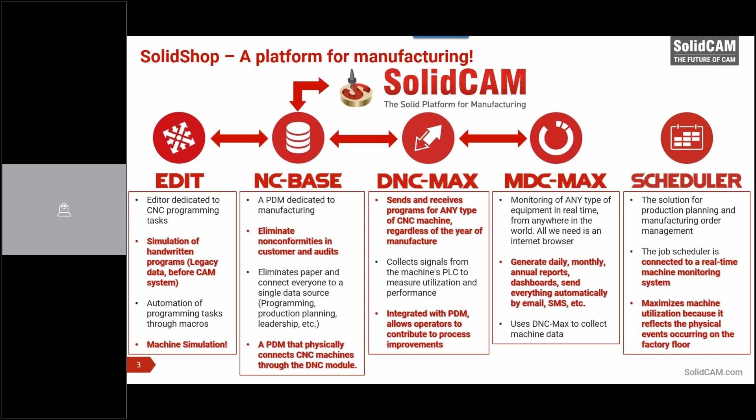So instead of spending $500,000 or $250,000 to implement a MES system that will take a year to be implemented, with SolidShop we can deliver a mini MES system for a fraction of that price, and depending on the number of machines, within weeks. Okay. So you see the data flows from one module to another, sometimes bidirectionally, and that's why we call this an ecosystem, because the data gets out from SolidCAM, enters the PDM, and then it's reused across multiple applications.

So what are the key business processes in a machine shop? We know that companies can have hundreds of processes, but let's talk about the very basic ones, okay? Everything starts with the quotation or estimation. Nobody manufactures anything without having an idea of the cost. Unless you are strictly a prototype shop, or nobody cares about that. But in general, a machine shop needs to know how much it's going to charge or how much something is going to cost to be manufactured. So this is where we start.

SolidShop currently does not have a solution for quotation, but we are talking to industry leaders, and we are going to bring quotation solutions to be integrated with SolidCAM and SolidShop. So we also cover this part of the manufacturing process and the manufacturing business. So we have CNC programming, which is where we operate on a daily basis. Nothing new here for us. So the first part of SolidShop is the PDM, the manufacturing PDM.

I'll try to make an analogy here. Programmers, they are like composers. Okay, you have an orchestra, and then you have a composer, right? The composer writes pieces of music to all musicians in the orchestra, but the composer does not execute this music. He just writes them. So that's similar to the CNC programming process, because a programmer selects and conceives the manufacturing process, selects tools, fixtures, all the parts, all the resources that are necessary. He thinks in the order of the operations, which tools in which order, or which side of the part I'm going to machine first.

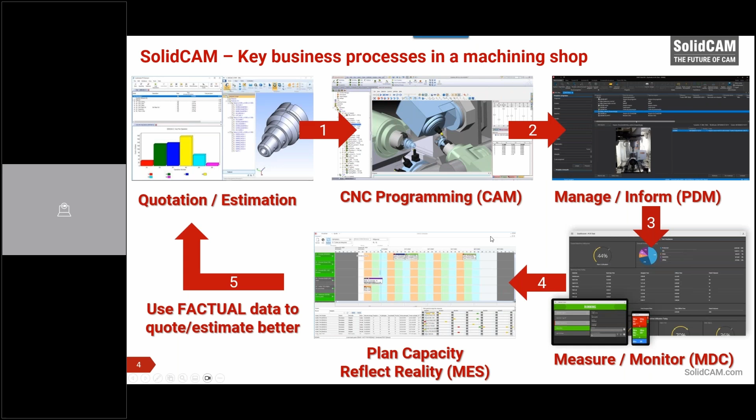And we believe that this will help us to increase our subscription rates and our margins in general, but also deepen the relationship with these companies because they will be happy with the technology we are providing them and solving multiple business problems instead of only CNC programming. So this is what we see.

For example, for the CNC programming department, we can offer CIMCO Edit, machine simulation, the PDM, which could be NC-Base or AMDM, like I said, depending on your needs. And we also have the DNC-Max, so they can manage all the communication with the machines without leaving the CNC programming office, which is something that management appreciates because programmers are more productive and they don't have to spend time in the shop floor solving basic problems.

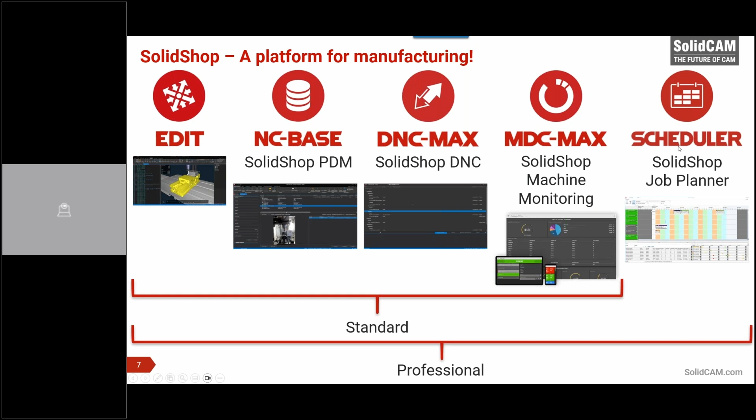And to finish, these are the companies around the world that are using this technology. So NC Base has been around for more than 25 years. DNC Max as well, CIMCO Edit. We also have the monitoring system that's been around since 2007, so almost 20 years. Very tested, very proven technology.

Works a lot on protocols and minimizes the usage of specific hardware. So yes, we can work with old machines or new machines, but if you have a newer machine, which is probably anything manufactured after 2010, 2012, you have protocols that are based on software and TCP/IP, which eliminates hundreds of issues that are created by the technology used by most of our competitors.

So now that I showed this to you, I'm going to demonstrate what this is in a nutshell. So I'm going to open SolidWorks and the PDM module as well. So let me just log in here in the database. So the first thing is that to access the PDM, you need to log in with a password. No one changes the program anonymously. Everything that happens needs to be tracked and is linked to an account and time and a backup and a version. So this is what the PDM looks like.

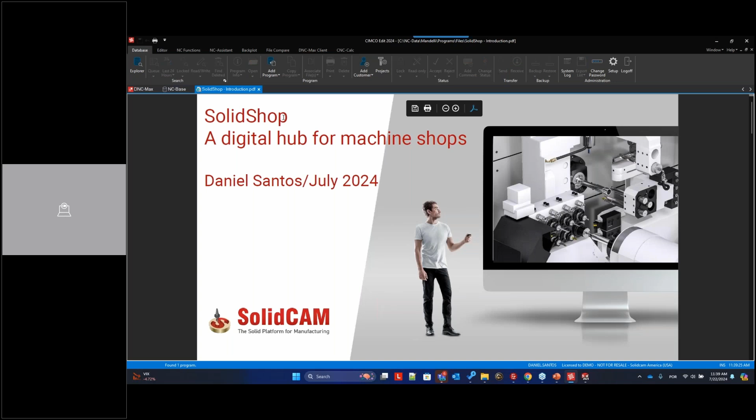If I want to make a change on this file, I can go here and say, well, I want to make a change on this PDF. So the first thing, I'm going to back up this version. And then I can go to Adobe and let me see here if I can change anything yet. So this is a viewer, so you can see this on the PDM client or a web client, but I could open this in Adobe Acrobat.

Let's see if I have the edit with Acrobat. And I'm going to call it SolidShop 2024, just to make a difference here. And we're gonna save it.

Okay, so now if I go here and open this document, this is the version that I have, right? The current version, because I made a change in Acrobat. But I could go here and say I want to restore this version.

And now if I open this again, I see the previous version. So you can make versions, and you can restore backups and all that.

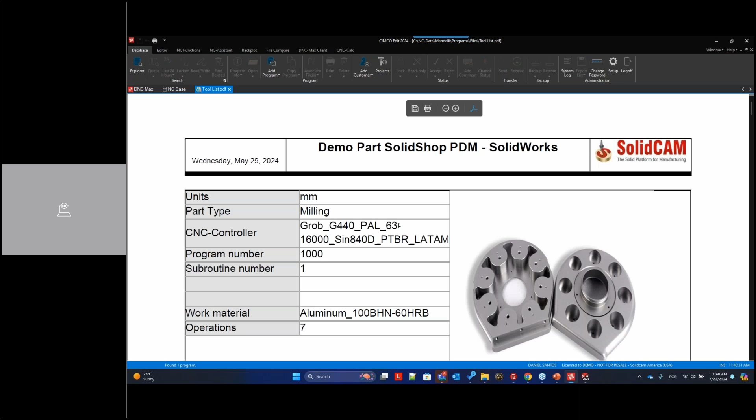You also have a tool list that's generated by SolidCAM, which can be linked to your document, or just like a setup sheet or something, or a tool list, like I said. You can associate pictures to your parts.

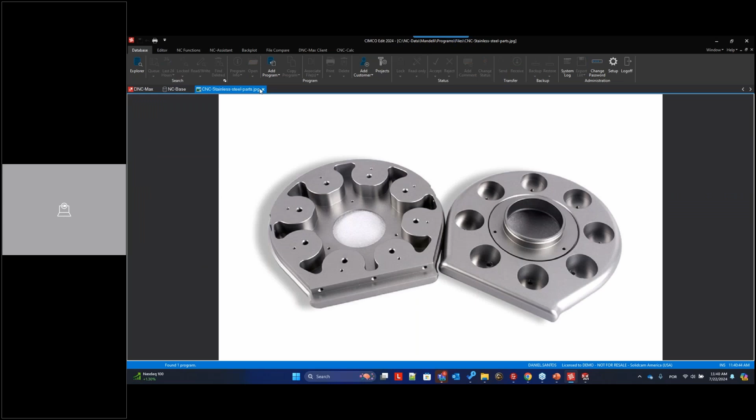You have here the change view, so you can preview the documents, or if it's a picture or a PDF you can see that, or you can preview the CNC program. But you always have here the event log, where you can see everything that happened with that document. So I can see only the preview of my document, or only the log, or both.

I can also add notes here that will force anyone who tries to open this document to read it. So let's say we need to wait for the new Emuge tap. There's no way that someone can say, I did not see that note.

And you can go here and change the status - this program is locked, already locked, you see? So people cannot send it to the shop floor right now because the document is locked.

So I'm preventing someone from using the CNC program or downloading at the machines because I'm waiting for a new tap for the CNC program. I can unlock this and say this program is now approved to run. So the system removed the locked flag here.

I can remove the notes as well and can send this program to the machine.

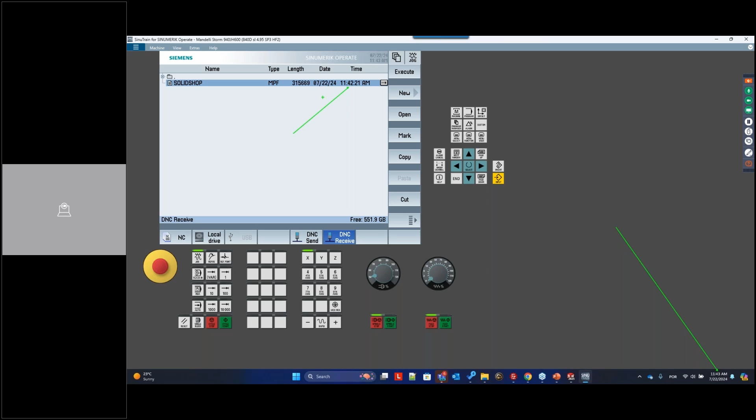And I go here to the DNC receive. You can see here that the CNC received this file at 11:42, which was a few seconds ago, okay? And I can simply copy this to the CNC memory and go here in part programs and paste it. I'm going to overwrite because I already had that program in the memory.

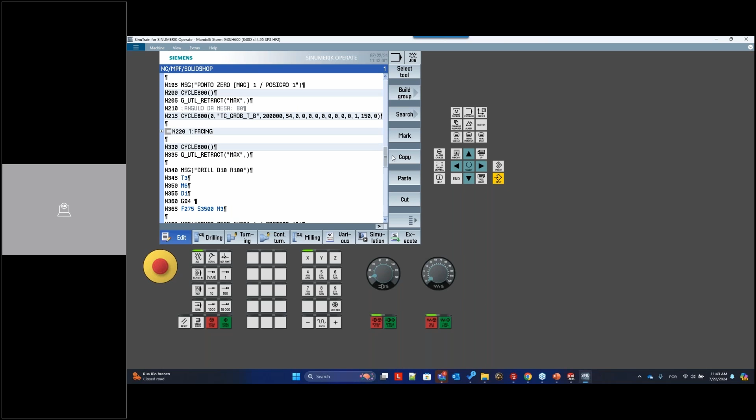And I'm going to make a change here, just one of these hard to read Siemens cycles here. I'm going to add an extra 0 here and break the cycle. So this angle here is going to be, let's just say, 3 degrees.

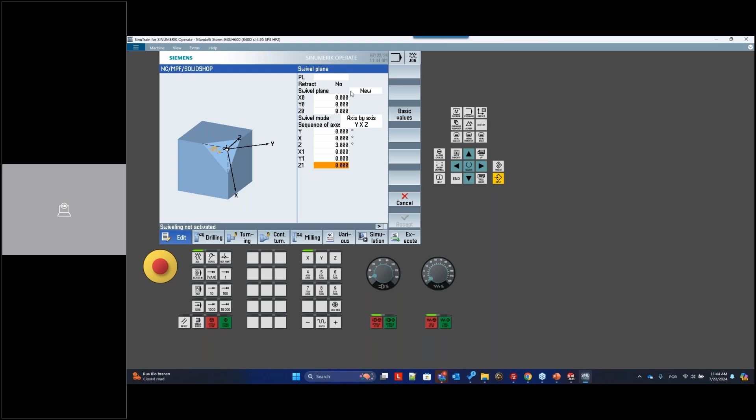Basic values - oh, yeah, I cannot do anything here because swiveling is not activated. So, by axis and basic values.

I don't think it allows me to change this because this is like a free version of the simulator. So I'm going to try a more standard cycle. Let's say that I want to change this coordinate here - a very small value, okay? As an operator, I'm making changes and they're very hard to notice, okay?

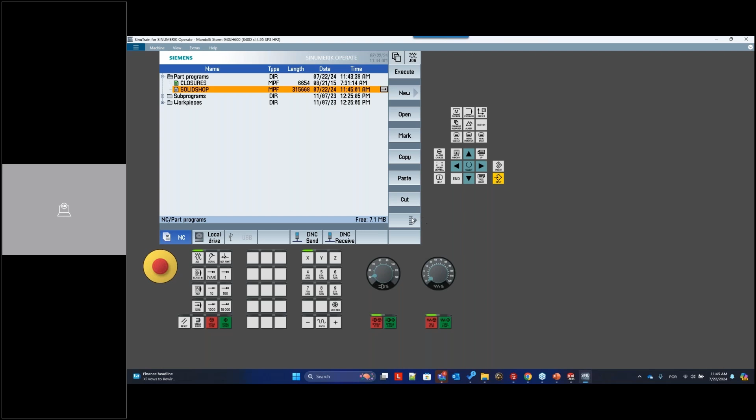I'm also going to open this iMachining operation and delete that small place here. And now that I've run this, I'm going to send this to the DNC from the machine - copy from the machine memory to the DNC.

And if I go now to my PDM product, I'm going to show you that I can also generate changes from SolidCAM. So now we have this instance here called import queue that shows me that we have a change that came from the machine. So let's compare and see this change.

Time and date, probably nothing else. And what I'm going to do now is say I'm going to reject these changes because they don't mean anything to the process, just date and time in the header. You can see here that Daniel rejected those changes. So let's just copy this again - from the machine memory to DNC.

Let's see what the PDM tells us. It shows there was a change again, so let's compare and see the difference the operator introduced. On the left you can see our current version, and I'm comparing my original version with the version awaiting approval, the version that came from the machine.

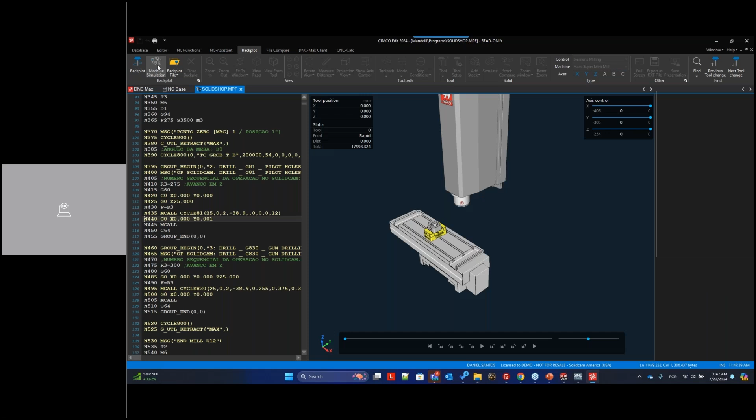Now I have machine simulation. I can add more machines to this setup or change the machines. Let's say I want to use a bigger machine, so I go to machine models - I can download them from the database. We can build these machines for you, and resellers can sell that as an extra service. If they have the machine simulation license, and the customer sends machine models to build or post-process the VMID file, you can use these models to build the machine simulation in SolidCAM and charge for that service.

Let's say I want to put this on a VF5 machine, so I'm going to install this machine. Now I need to close this - I can go here and say I want to use the VF5 instead of the mini mill for machine simulation, and now I have a big machine again.

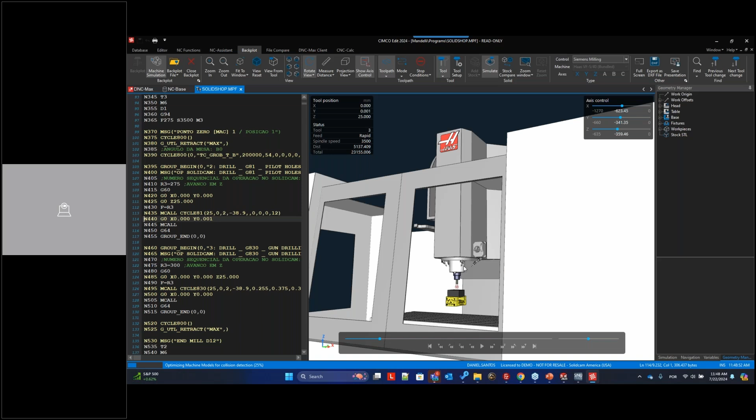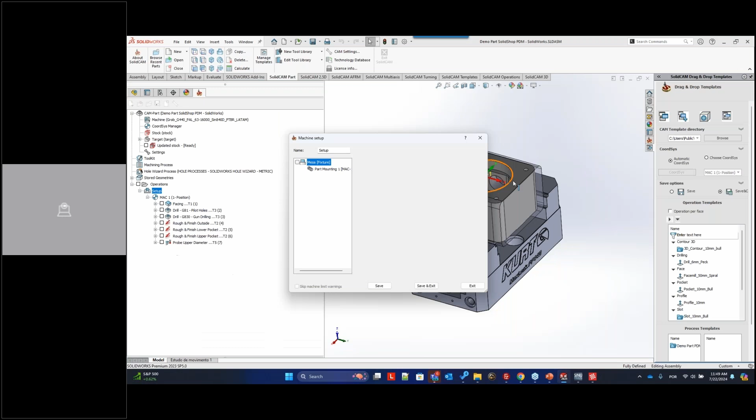I need to adjust this in the SolidCAM interface. So when you go to SolidCAM, you need to change your post, and on your setup you're going to select your mount, everything, and then this is transferred automatically to the interface, including this, okay. So if I go to the machine simulation, I also have the tool setup with all the tools that were transferred from SolidCAM - this is also part of the interface.

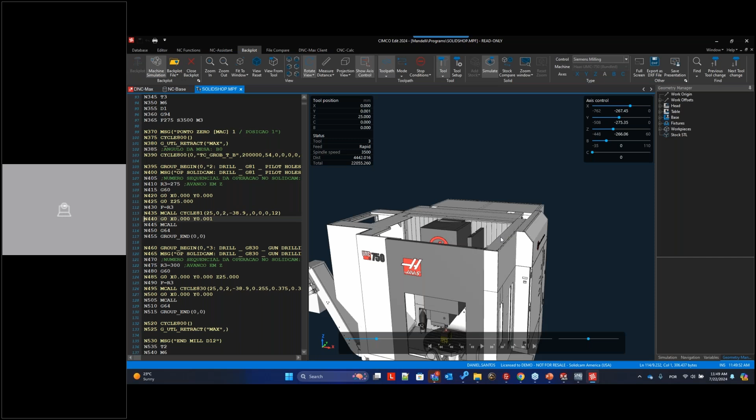Let me just mount this on a machine that has the proper point - let's say the Haas UMC. And then I can go here and say I don't want to see the base. Let's run this process from the beginning so we can see what the operator did.

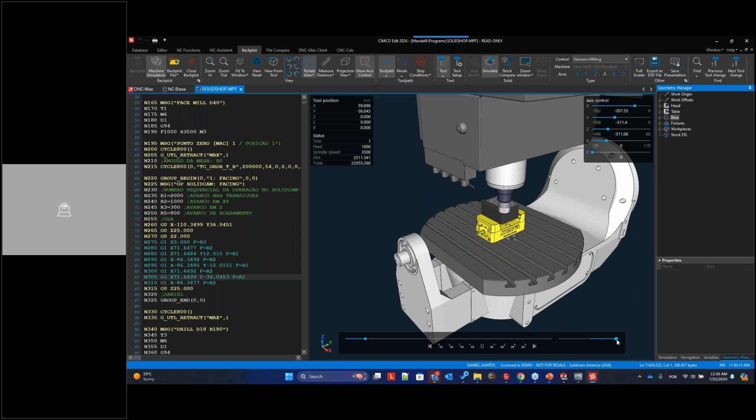So you are doing G-code based simulation, like VeriCut. You can also go here and say I want to simulate this, check the limits of the axis, see what happens when I do this or that. This machine simulation is fully functional for up to 5 axes.

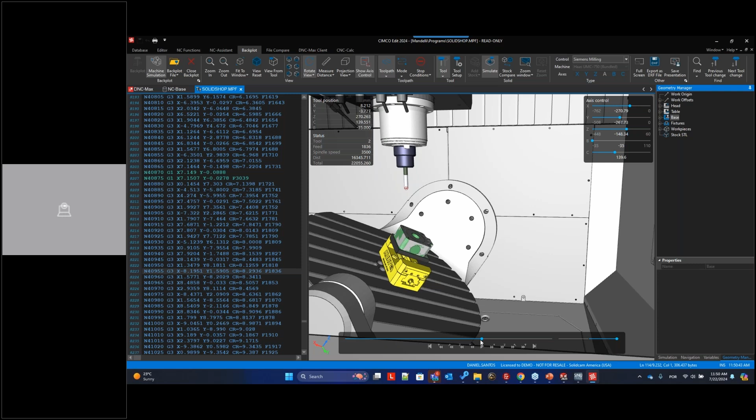You can measure things - let's say, for example, that I want to section the part. I'm going to reset this because I need to start from the beginning as I move with the axis. Let's say I want to understand what's going on inside the part. I can go to my stock model and say cross section on the Y minus direction, or Y plus - sorry, Y minus.

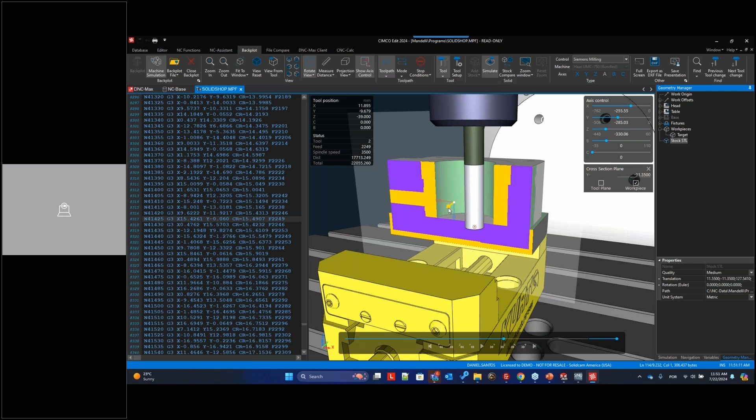I can dynamically push and pull and see what's going on here. I can change the sectioning plane. So I'm going to reset this, remove it off - the cross section is off. And let's finish this.

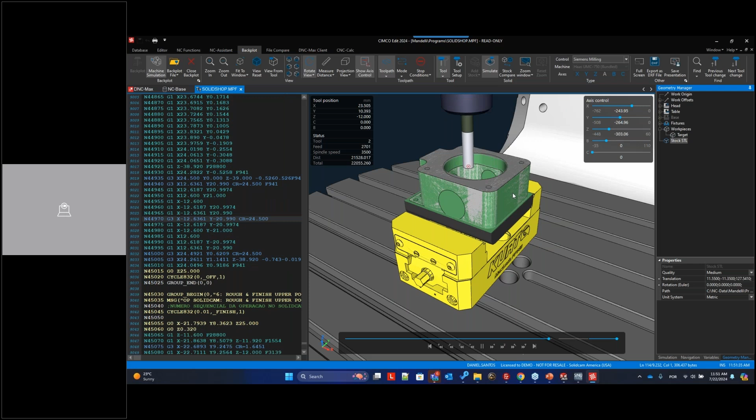Let's suppose I'm going to make a change here now. As the CNC programmer, I'm going to introduce a very big mistake here, an error that will cause a collision on the machine. Let me see if I can move this - no. Around here, I know I can have a collision, okay, so let's say G0 X minus 200.

If I make this change, the PDM is going to prompt me: look, what are you doing here, why did you change this? I'm going to say optimized code. So did you mark it as approved? I'm going to say no - you can customize your questions here. I can go and say I want you to prompt me for multiple issues, like did you check the tooling, did you update the tool list, and so on. Let's see - logging, log chains. I'm going to say optimized code, tooling changes.

You can configure that on the PDM, and you can say, did you update the tool list? That's required. Did you update the toolkit? The answer is required.

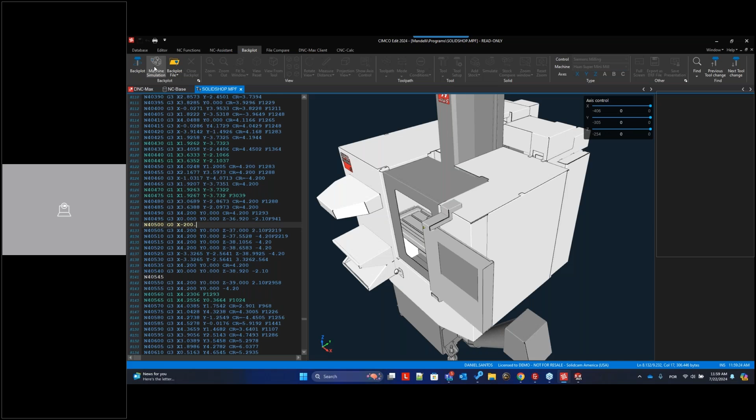Now I'm going to close this. I have a technical issue here, the meeting might kick me out, but let's try again. Okay, so I was showing a change that can be introduced by someone. Let's go back to the machine simulation, resume where we were. I'm going to go with the Super Mini Haas again, just to save us time.

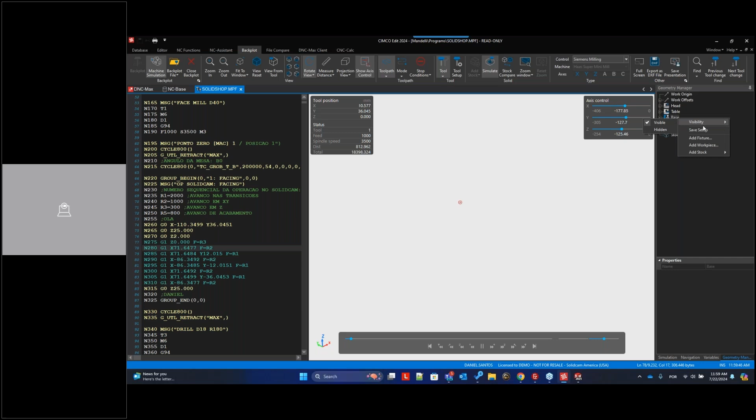So you can see here that we have a major collision in the process. Let me just hide the machine base so we don't have problems. Okay, so speed up.

So this change that was introduced by the CNC programmer, we can now detect that. But let's say that it was the opposite - let's say the operator introduced this. Because we have bidirectional control on the PDM, if the operator introduces any mistake on the code, before we release that program for production again, we can simulate.

And if any changes that were made on the machine are causing a collision or a problem, the machine simulator will catch it. So the point of the machine simulation and our PDM is that you have bidirectional protection. You can quickly control who changes what, when something is changed, why it was changed.

You can roll back backups. So let me roll back the good version then. I can go here to the data - this version is bad, right? So I can compare with the previous version and see that the mistake was introduced here.

So this is backup number 34. I can click here on version 34 and say restore this version, because this version has no collision. Okay, so I go back again, open, simulate.

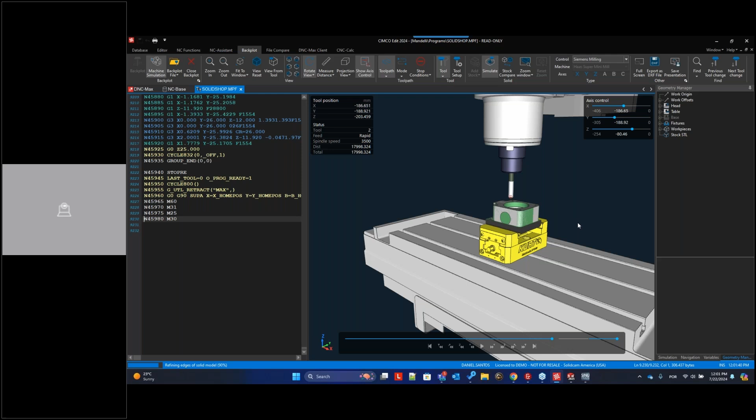So this is something that for years we were not able to solve for the customer - what happens if the operator introduces the problem? And what we can do here is just go here...

I have an idea here in the location that I can cause a good collision. So this is going to be around 40,735. Let's see, yeah, around here. So I'm going to go Z minus, let's say G0, X200 now. The operator introduced this error in the process.

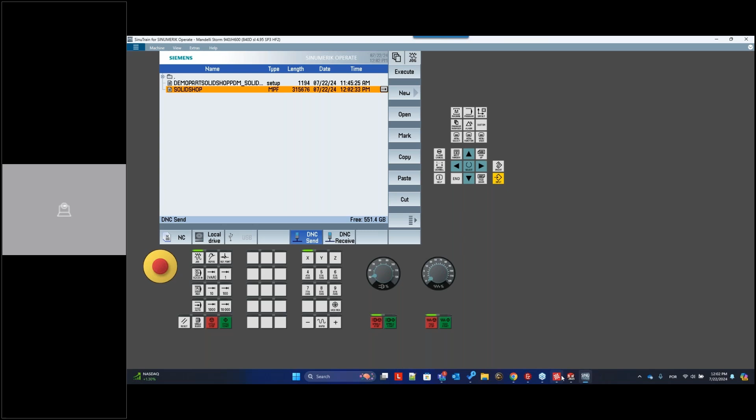So we go here, we're going to copy this from the CNC memory to the DNC system. DNC Max will detect the file change. I can show this to you here. And you see that we just received a change.

So look at this - at 1202, which is here, a file was received and it's awaiting approval from a programmer. So the change does not overwrite the latest version of the database automatically. A programmer needs to approve that. So I'm going to go here and queue.

I'm going to compare the change. And I can see the coordinate that the operator introduced, but I don't know what the effects of that are yet - I need to simulate to see. So what I'm going to do here is accept the imported file and simulate that.

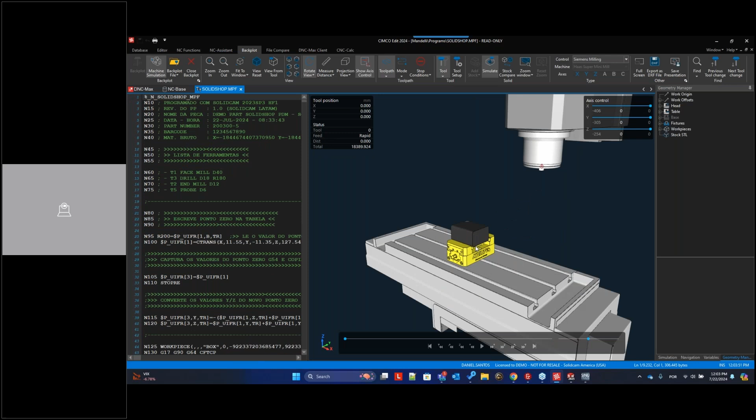And now I want to show you the SolidCAM for operators also playing a role in this. Okay, so I'm going to simulate this again. And now we have the error that the operator introduced.

So we have protection bidirectionally. So now I can go here and say this program has failed. I can also configure these life cycles with any names I want, but for now I'm going to just go with the default names. So now this program is locked, it cannot be sent to the machines because we need to fix the error that the operator introduced.

Roll back an old version or something - I can compare in the timeline any version I want. I want to compare version 25, which is from May this year, to version 5, which is also from May. Compare the selected versions, and the system shows me everything that changed.

So you can sell this to the customer. Imagine that you are doing an ISO 9001 implementation, and you need to provide evidence to the auditors about every change that occurred in the manufacturing process for the past 2 years.

Let's say in the worst case scenario, there's an FAA investigation, a plane fell from the sky, and the FAA needs to start investigations, and they go to the shop that manufactured that part, and they need evidence of every change that was introduced in the process. This is how you do it.

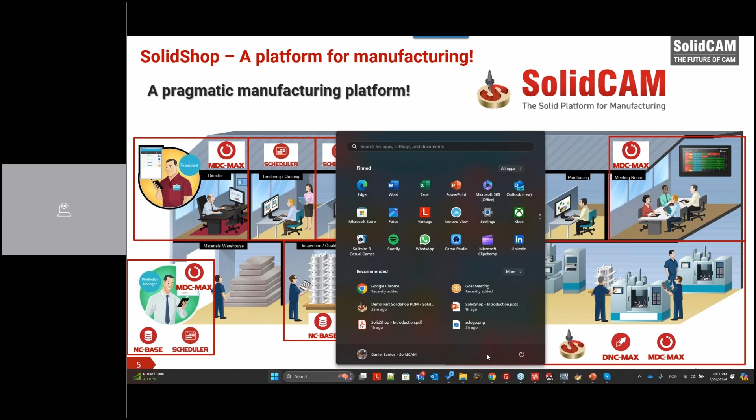So let's just go back here to our presentation. I want to highlight that slide with the company processes. It's here. So I have this part in SolidCAM for operators, and I have this digital ecosystem in the shop floor or in my business, this one here, right? Where CNC programming is connected to the other departments. So production. Okay, so I have this slide, and I want these guys here from the production shop to mention this.

One sec, let me take this. Who is this? Hello?

Okay, so what I want to do is make sure that no one is editing a file that is being edited by CNC programmers or vice versa or operators. So if I have SolidShop and I have SolidCAM for operators, let me show you how this works. Right now, the CNC programmer is on the upper floor working on this part, and an operator in the shop floor tries to open the same process.

So I can go here. He can do this also from the NC-Base client, select the file and ask SolidShop or SolidCAM to open this. So I'm probably not opening the same files here. Let me just highlight this. So this is my CAM part properties. I want to make sure that I'm opening the same file. So this is, yes. Okay.

SolidCAM for operators, close, open. Yes. Let me make sure that I'm opening the right file here. Because when you try to do this, the system will basically say, you cannot open this. It's like trying to open the same file that is stored in the network from different places. Yeah, you see, that's the reason.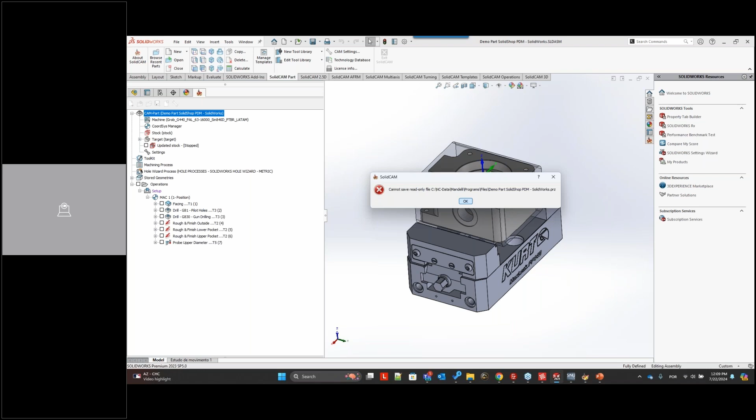When we restarted the computer, we got the file saved as read-only. So that's why SolidCAM is not detecting the change. So let me just fix this. So this goes here. This file should not be read-only. That's the problem. Okay, apply. And SolidCAM, close. And same thing here. Open. Good.

Yeah. So you see, it says that this file is being used, right? Because someone is trying to use it in SolidShop, SolidCAM for operators, in the shop floor, and vice versa. So it protects the file from being edited by two different people in different locations. They don't even have to be next to each other, because we have this protection mechanism that when a PRZ file is opened, you cannot open it from another.

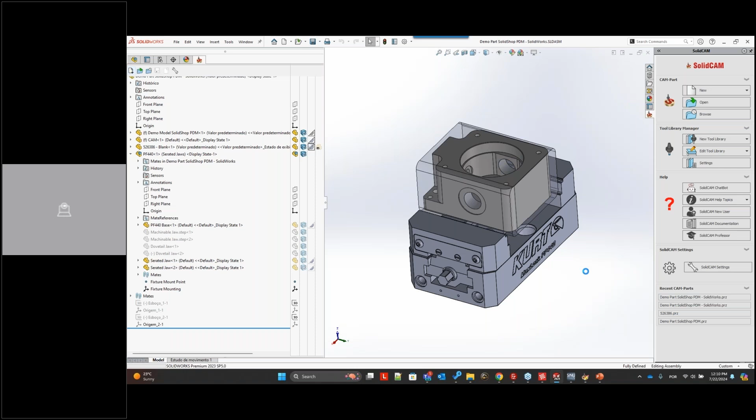The PDM is managing one central location, one single file to be shared in the whole company. So we protect them from editing. So this is the value of SolidCAM for operators working with the PDM solution, right? We also have the ability to back up our file.

So imagine, for example, that you want to introduce engineering revision, okay? If you don't have SolidWorks PDM or Autodesk Vault, you are managing files only in SolidCAM PDM. And you want to introduce a version control on your PRZ file. So what you can do here, before you implement the change, you can go here and say, make a backup.

Now you can make whatever change you need in the SolidCAM file. If something goes wrong, you can always restore the previous backup and ensure that you can restore your good file. And finally, I just want to show here a basic example of editor functionality that we do not explore much. So imagine that I have a bad bearing on the machine right now, but I still need to finish a batch of parts.

So what I'm gonna do here, I'm gonna go to this editor and say, reduce the feed rates by 50%, because I don't want to completely damage the bearing, but I need to finish this batch of parts before the machine builder can ship me a new bearing, because they don't have it in stock. So I'm going to reduce the feeds and speeds by 50%, and in the editor, I'm going to save that, and then the editor is going to say, reduced speeds to finish this batch of parts.

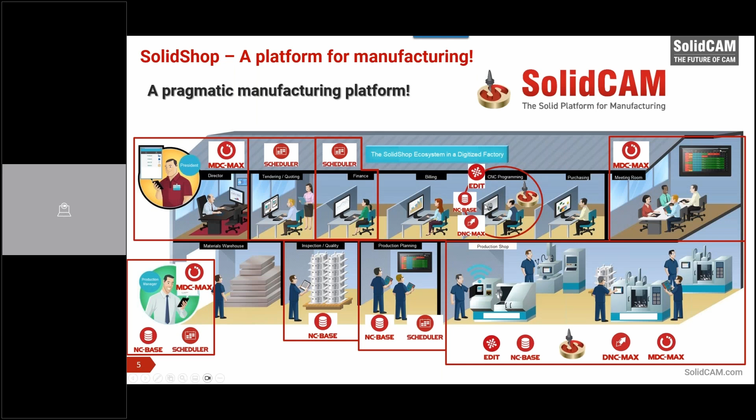So I'm going to close this, try to open this. So this is what I wanted to show you before. You can see that SolidCAM for Operators cannot open a file that is open in another department by the programmer that is on the upper floor. This guy here cannot open the file that this guy is working on, and vice versa, because the PDM layer will protect them from doing that. So let me close this file first.

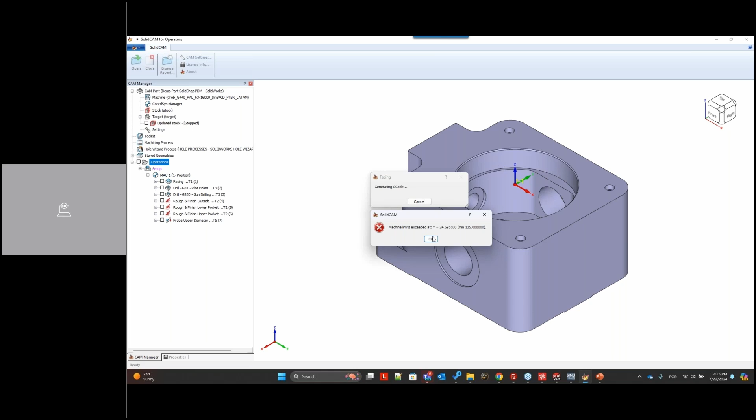And I'm going to open this with SolidCAM for Operators. And we are going to post this. So any change made by the operator, either on the CNC control or via SolidCAM for Operators, is 100% tracked by the PDM. So what we can do here now, go to the database and you can see that we have a new version. If we compare this, the mistakes are no longer there. You can see the feed rate that I changed.

So now I go here, log off, because I am operator. I'm going to say I am Mr. Operator. I want to see this change. And in this specific example, I put operators with permissions to accept or reject files, but we can change that. We can go here to user groups and say administrators can do all this, operators have these options, and programmers have these options.

And this is how I create a new user. I can say user.demo, first name, last name, doesn't matter. And I can say this user is member of operators. We also have clearance levels. We can control documentation, say this document can only be seen in the PDM by manufacturing engineers or by operators or by supervisors. So I can go here and say, hey, I have a quotation here.

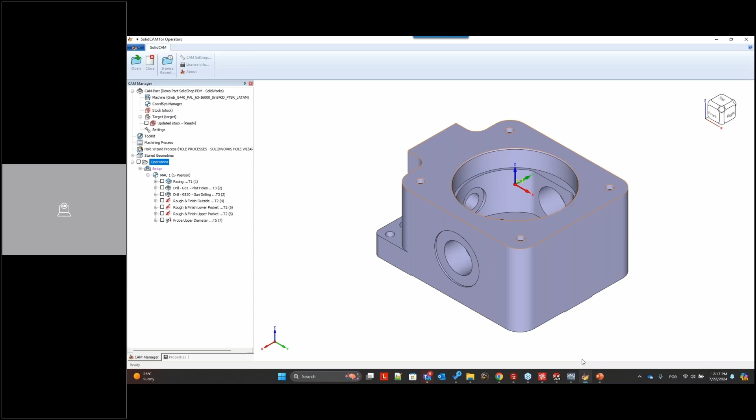So with this, I finish this first webinar covering the editor very, very superficially, but NC Base, the PDM. You also have MDM, which is a more configurable PDM. A little bit of DNC Max, but in the next webinar, I'm going to cover DNC Max a little bit more in depth, MDC Max, and Scheduler. And then the third webinar, we're going to talk about business, licensing, costs, and all that, and challenges as well.

But today, my expectation was to show you the power of SolidCAM for Operators working with the DNC system and a PDM that manages all the communication between the machines and the database, but also tracks every change that's made by CNC programmers, operators in the shop floor, or anyone that has access to the PDM database. And in regards to operators, we can track changes made on the CNC control or changes made via SolidCAM for Operators.